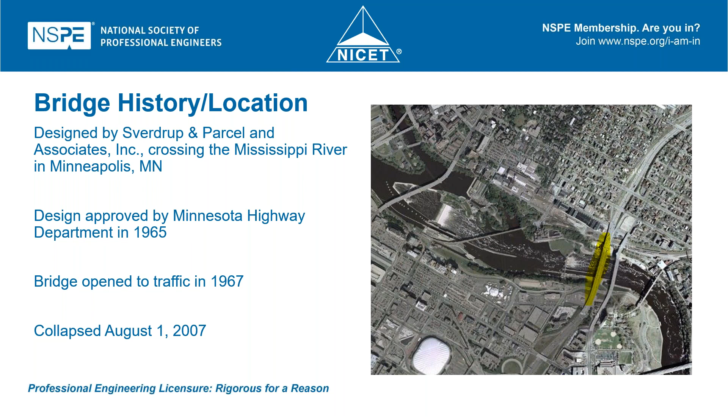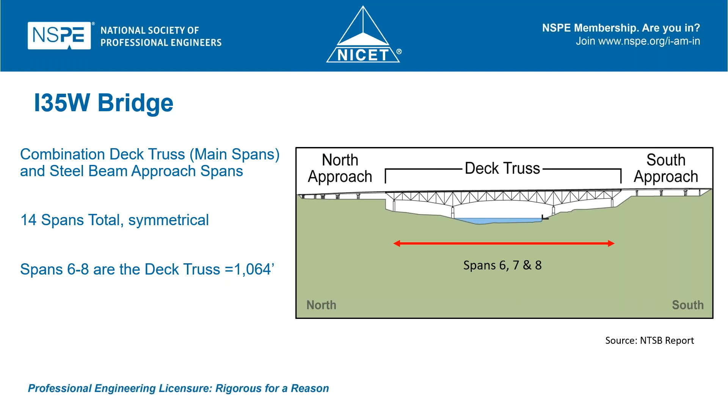It is a combination of deck trusses and steel beam approach spans. There are 14 spans total. It is perfectly symmetric. Spans 6 through 8 are the deck trusses, so exclusive of the approaches, and that is 1,064 feet.

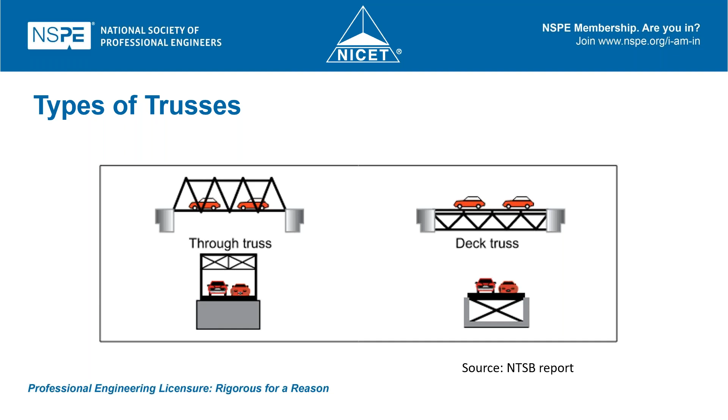Of the types of trusses that we run into, we have through trusses, where the cars are going between the upper and lower span, and deck trusses where both the upper and lower span are below the vehicles, and in fact, the upper span is what's supporting vehicle traffic.

The I-35W deck truss, meaning that the entirety of the truss is below the road surface, was used by 141,000 vehicles per day. And it is a fracture critical bridge. We're going to talk a little bit more about exactly what that means.

But just as a reminder, if you haven't done trusses in a while, the top member of the truss is called the upper chord. The lower member of the truss is called the lower chord. Terribly, terribly creative. And the deck here was 8 lanes wide, 113 feet. And you can see that a portion of the deck is cantilevered.

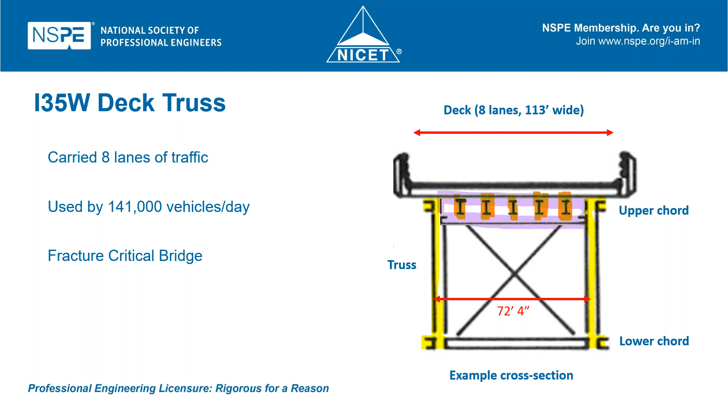So that's the overall structure of the bridge. The I-35W superstructure spans piers 6 through 8, because the north and south approaches are not in structural play. So the part that works as a unit is 6 to 8.

It has 2 trusses, 27 floor beams, which are welded, built-up members in the trusses, stringers that are 27 inches, 14 each between each floor beam at 8-foot 1-inch centers. And the bracing are L members. For orientation, we have the stringers at the top, the floor trusses down from the top, the west truss, the east truss, and then bracing members. All of that is below the road surface.

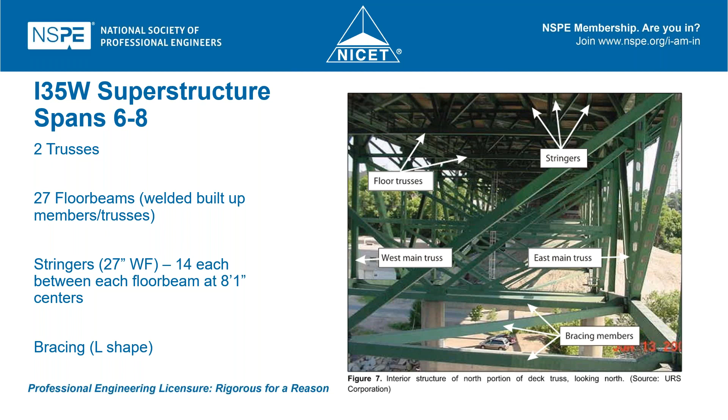Okay, so we have truss members and nodes that come into place here. Along the upper chord, the members are connected with gusset plates. They are connected with both vertical members and diagonal members. They all come together at the gusset plates.

Excuse me for one second, I forgot to remove my phone. Sorry about that.

Our upper chords and the vertical members are welded box shapes. The diagonals are welded H shapes, which you can sort of see from the shadows here. And the nodes are riveted gusset plates. The rivet configuration gets a great deal of attention in terms of the design of the rivets and evaluating the ultimate strength of the members with every puncture hole.

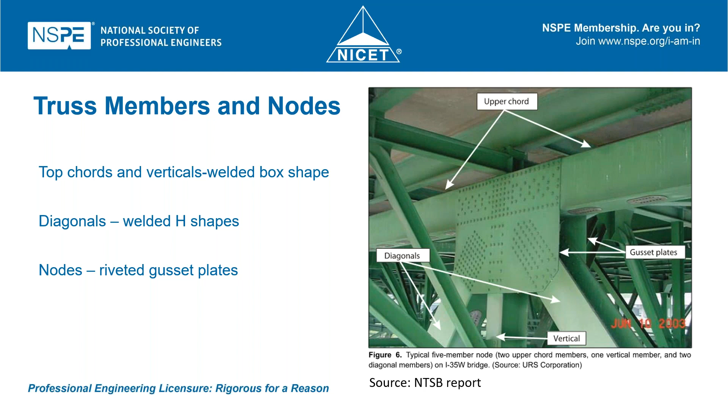You would expect there to be a symmetric failure since it's a perfectly symmetric bridge. Were it not perfectly symmetric, you might get a different distribution of failures, but since it's perfectly symmetric, we would expect a symmetric failure, and in fact, we got one.

Here are the modifications that have occurred to the bridge since it was opened in '67. In 1977, 2.5 inches of concrete was added to the deck to provide additional cover to the reinforcement. In 1998, the median barrier and traffic railings were replaced, an anti-icing system was added, and rehab was performed on the piers, the slab, and the cross girders.

In 2007, there were repairs to the deck slab and the expansion joints. The anti-icing system was replaced, and that work was in progress at the time of the failure.

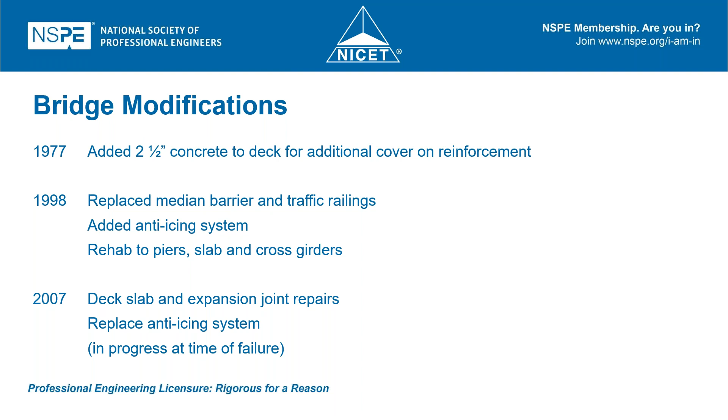Now, think about that for a moment. You have an extremely busy bridge that's partially closed. So the traffic that would normally be splayed across a number of lanes is concentrated into one lane. And add to that, we've got the construction equipment that's on the bridge. Just keep those little things in mind as we take a look at this.

This is the first of the polling questions. Did the 1977 update to the bridge, adding 2.5 inches of concrete to the deck: A, have no effect on the bridge design; B, increase the live load; C, increase the dead load; or D, both B and C?

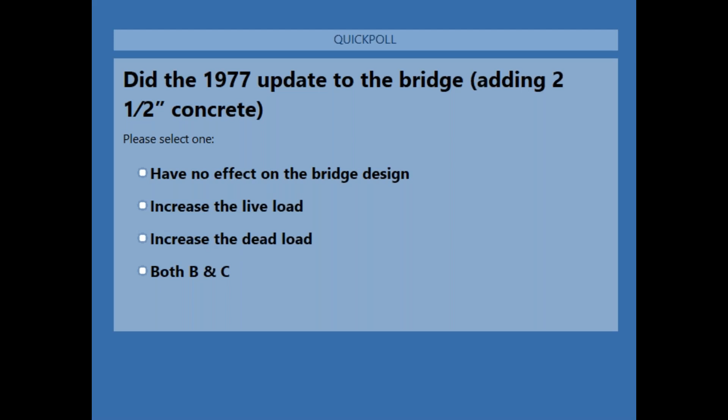All right, the results: 73% said increase the dead load, and 26% said both B and C. In general, the accepted answer would be C. I have seen some elaborate arguments as to why it would affect the live load as well, but it's absolutely uniformly agreed that it does increase the dead load.

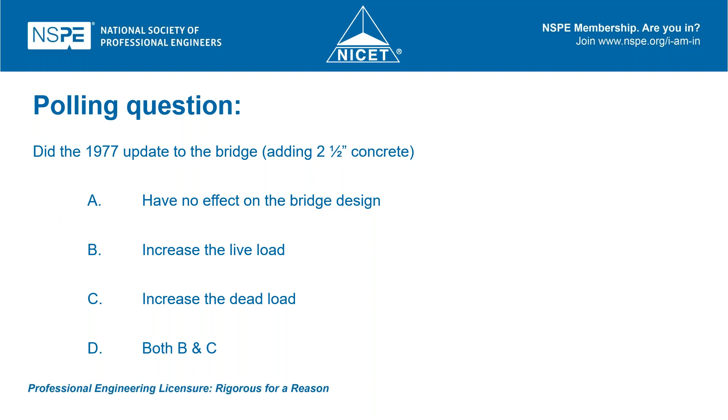Now, I don't know about you, but if I have a change order to a contract while I'm building it that increases the dead load, I go back and take a look at my numbers. Yeah, no, that didn't happen here.

The NBIS regulations apply to all publicly owned highway bridges longer than 20 feet that are located on public roads. They require a bridge inspection at intervals not to exceed 24 months. So anytime you have a highway bridge longer than 20 feet on a public road, the inspection must be completed at least every 2 years. So somebody's looking at the bridge every 2 years.

We're going to take a pretty close look at the bridge inspection process because it's important to understand that process in order to understand the role of the PE in all this.

A bridge safety inspection includes five tasks. The first is planning: identifying in advance the needs for traffic control or traffic restriction, the need for access and safety equipment, inspection tools, personnel, and daily schedules. Unlike a land-based construction project, a bridge inspection process has additional safety factors because you are necessarily in an elevated situation, so the planning here is very much safety focused.

The second step is preparation, which means exactly what you think it means: gather the equipment that you need and identify the services that are required.

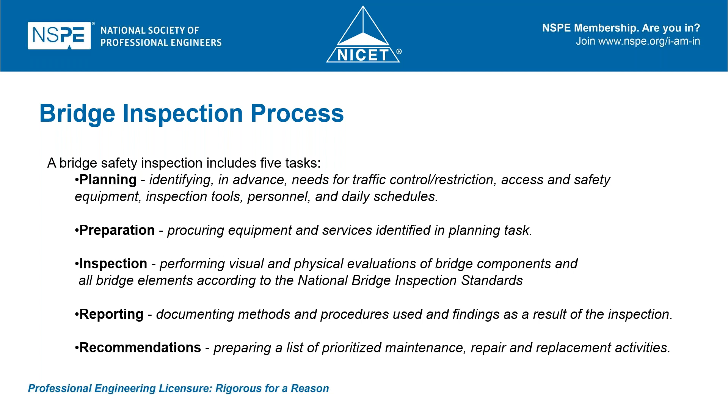The fourth step is reporting, which involves documenting the methods and procedures used and the findings from the inspection. Finally, the recommendations: preparing a list of prioritized maintenance, repair, and replacement activities. We'll talk a little later about whether an inspector has closed facility powers.

A bridge inspection report is a legal document and must be sealed by a PE. It includes specific, detailed, quantitative where possible, observations and photos.

There are qualification criteria from the Federal Highway Administration. A program manager must be a PE and have successfully completed the training course, or have a combination of 10 years of bridge inspection experience and the training course. So a program manager might not be a PE.

The team leader must be a PE and have successfully completed the training course, or have a combination of bridge inspection experience, NICET level 3 or 4 certification, a degree, and a training course. One of those two roles must be filled by a PE, so there are qualification options for both roles, but one of them must be a PE.

The bridge inspector's role is to be continually on guard for minor problems that can become costly repairs, to recognize bridge components that need repair in order to maintain bridge safety and avoid the need for costly replacement, and to make recommendations to close a bridge if necessary. So yes, the bridge inspector does have closed facility power.

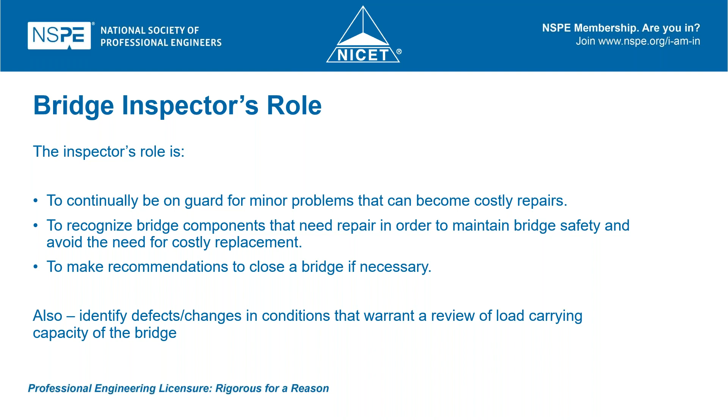So we've talked about his responsibilities. What are the bridge inspector's liabilities? In the event of negligence in carrying out the basic responsibilities described above, an individual, including department heads, engineers, and inspectors, is subject to personal liability. That's huge. Strive to be as objective and complete as possible.

Accidents that result in litigation are generally related, but not necessarily limited to, deficient safety features, failed members, failed substructure elements, failed joints or decks, potholes or other hazards to the traveling public, and improper or deficient load posting.

Anything said or written in the bridge file could be used in litigation cases. In litigation involving a bridge, the inspection notes and reports may be used as evidence.

If you've ever participated in a mediation, one of the things the mediator tells you right out of the gate is that nothing said during the mediation can be used in court. You cannot subpoena the mediator's notes, you cannot subpoena anything presented to the mediator, and you cannot subpoena or ask any questions about settlement discussions.

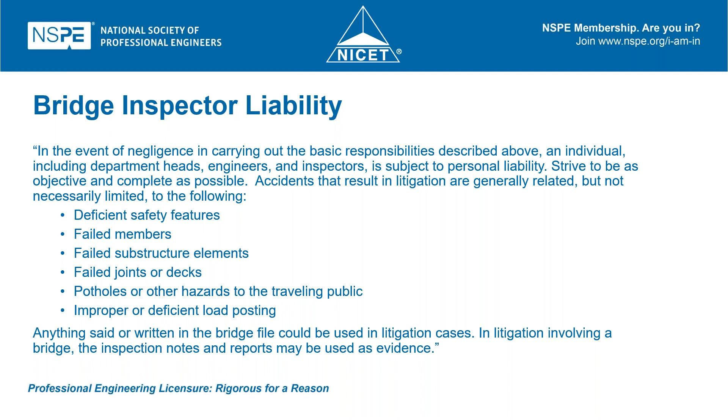And you'll notice it's personal liability. There are a couple of states that do not permit indemnification of a bridge inspector by the employer, which means that the employer's insurance would not be answering those claims. Be sensitive to that. By the way, you're not in one of those states, so that's good. But be aware that there are states that prohibit an employer from indemnifying a bridge inspector for negligent work.

This is sort of a little bit for the fun of it because it's cool, but this is a picture of a snooper being used. You can see that the crane is up on the deck and it has a C-shaped arm that comes down and carries the inspector about.

Inspecting a large bridge like this takes several days to weeks, and the inspection includes the superstructure, the substructure, and the deck, which makes sense.

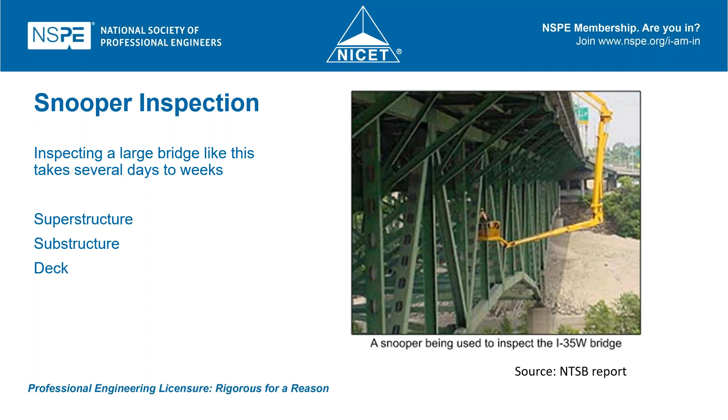Now, we've seen some enthusiasm lately for inspections conducted by drone. I don't know exactly where that's going. I rather expect that it will gain in popularity. For one thing, it's safer. And if you attach a robotic camera to the end of maybe a snooper arm like that, you can get all of the outside pieces that way if you want to, and send the drone in to do the interior pieces. This requires some very tight drone operation because, again, the images must be within touching distance or arm's length. That standard has not varied whether a drone is being used or not.

Okay, here are the I-35W bridge condition ratings over the years. So one of the conversations we need to have is, what is structurally deficient? Structurally deficient means a bridge has deterioration to one or more of its major components, that being the deck, the superstructure, and the substructure. And that deterioration results in a component condition rating of 4 or less.

So you see here in Table 5, the condition ratings, sufficiency ratings, and status for the I-35W bridge, between 1983 and 2007. In '83, '84, '85, '86, '87, '88, '89, '90, you see that everything is well above a 4. There's 6s, 7s, a couple of 8s.

So in '91, however, we see that we have gone to structurally deficient. And it's structurally deficient the rest of the time, except for 1999. The reports indicate structural deficiency. All of the structural deficiencies have occurred in the superstructure, but it renders the entire structure structurally deficient. So that's the status that was being sent out.

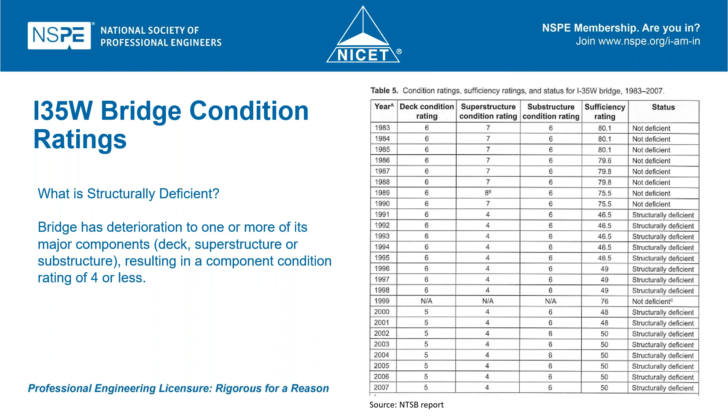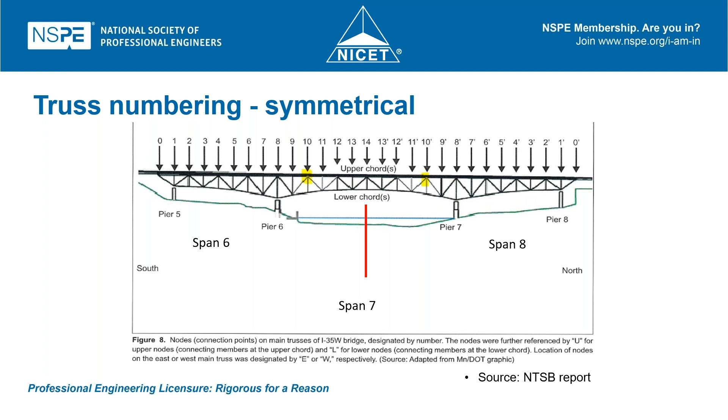U10 east on the east side of the bridge, looking north, you can see that, again, that line is not a straight line. It isn't terribly obvious from that photograph how the gusset plate is bowed, because it could also look like it's a little bit crumpled, but it's not. It's bowed relative to the surface of the gusset plate.

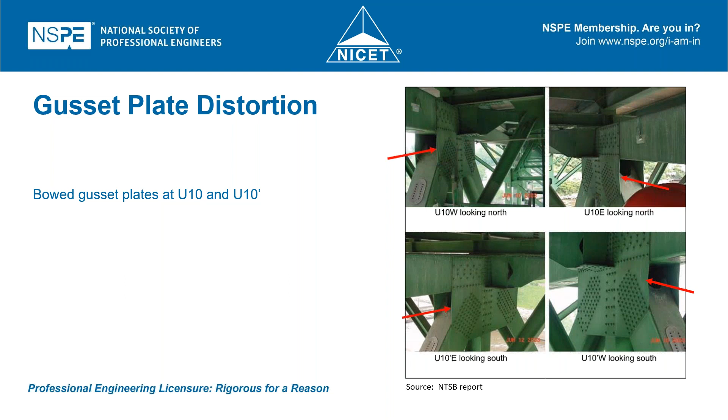It's convex. U10 prime east, looking south, is bowed. Not so obvious in that picture at all. But U10 prime west, looking south, it's obvious that that is not a straight line. So we have documentation of bowed gusset plates at exactly the failed locations.

The bridge collapsed August 1st, 2007. It was 6:05 p.m., rush hour, with extra traffic going to a baseball game. There were 111 vehicles on the bridge, 13 fatalities, and 145 people injured. The collapse of the river spans also caused collapses back into the approach spans.

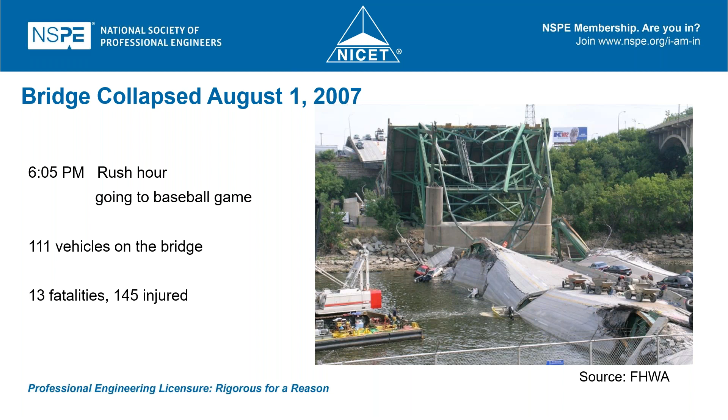The NTSB investigation and recommendations, this information comes from the NTSB report. The cause of the collapse was inadequate load capacity of the gusset plates at the U10 node, due to design error, and the design review process was inadequate. The result was that the bridge design QA/QC process must be improved because the design error was not caught.

In addition, we had distorted gusset plates at U10 and U10 prime that were not documented in the bridge inspection reports. As a result of this finding, the FHWA issued guidance and revised the bridge inspection training courses to emphasize gusset plates, inspection techniques, and non-destructive evaluation.

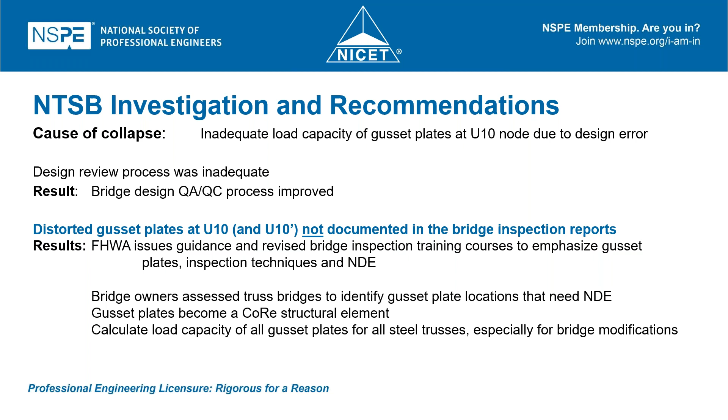What's key about that finding is that gusset plates were not on the list of required inspection. Now they are, because there was no finding of an issue with anything except the gusset plates. So bridge owners assessing truss bridges are to identify gusset plate locations that need non-destructive evaluation. Gusset plates became one of the core structural elements, so we now have four. Bridge owners were required to calculate the load capacity of all gusset plates for all steel trusses, especially for bridge modifications.

Second polling question. During inspection, the inspector should have: A, reviewed all items specified on the inspection list; B, observed and noted that gusset plates were bowed; C, observed and noted that some gusset plates were a half inch and some were one inch; D, all of the above.

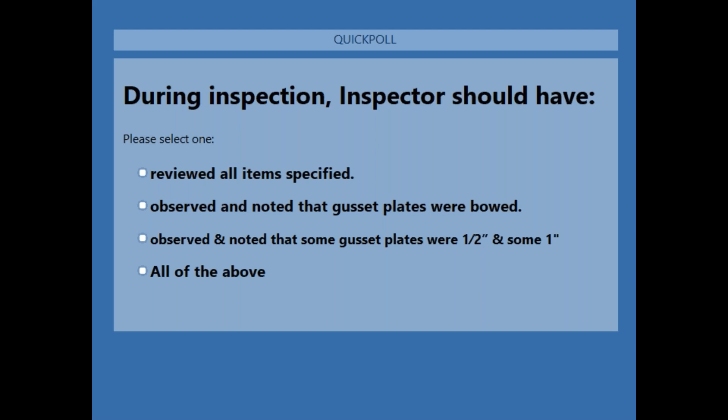Okay, our results: 5% said reviewed all items specified, 8% said observed and noted that the gusset plates were bowed, 1% said observed and noted that some gusset plates were half inch and some one inch, and overwhelmingly 85% said all of the above.

Okay, everybody in that 85% should pat yourselves on the back. Doing the minimum inspection, reviewing all the items specified, isn't all there is to the process. The inspector is there to bring the inspector's knowledge and experience.

If you see something that should be a straight line and it's not a straight line, that should be observed and noted. And you can't possibly inspect the members in the superstructure, the substructure, and the deck without going past the gusset plates. You simply physically can't do that. So yes, you should look at the gusset plates, noticing they were bowed. Even if you take a photograph of their current condition and go back and say, I see from this photograph they were bowed like that before, fine, but you still report it.

Now, C is an interesting one. The design called for all gusset plates to be one inch, and of course the inspector has the plans going in. The inspector is not expected to run around with a ruler checking if the gusset plates are all one inch thick. But trust me, if you've done any kind of work with structural steel members, you can quickly recognize something that's half of the one inch depth requirement versus the full inch. You might not know if it's 7/16 or 9/16, but you can quickly see it's not one inch. And that should have been noted.

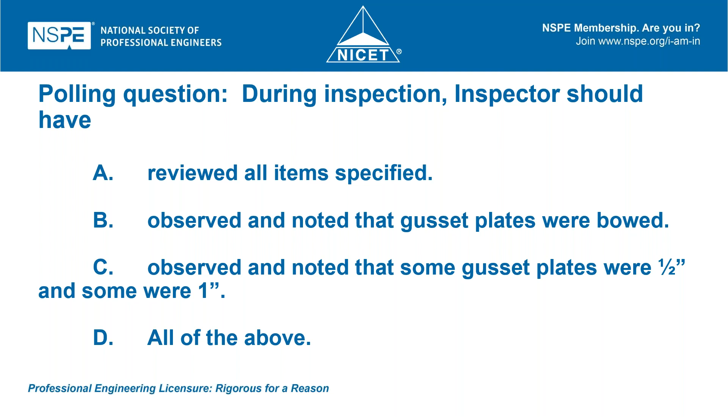So the answer here is all of the above.

So February 11th, 2009, PennDOT issued Directive 2009. Now, I know you're not Pennsylvania, but I am, and so that's the example I use. Almost all the DOTs did something roughly equivalent because the Federal Highway Administration required them to. In publication 238, the Bridge Safety Inspection Manual, there were revisions to chapters 3 and 6.

And they addressed the inspection and load rating of steel gusset plates, and those revisions were effective immediately. So as soon as this was put into play, all the inspectors had to go to a special one-off update training course, and then it was incorporated into subsequent presentations of the training course.

Now, what is non-destructive evaluation? Let me back up a second and say we all know what destructive evaluation would be, like taking a core or slicing off a rivet to investigate the nature of the connection behind it. That's not really helpful because then you have a problem. You've created a problem. So we want to focus on tools for non-destructive evaluation.

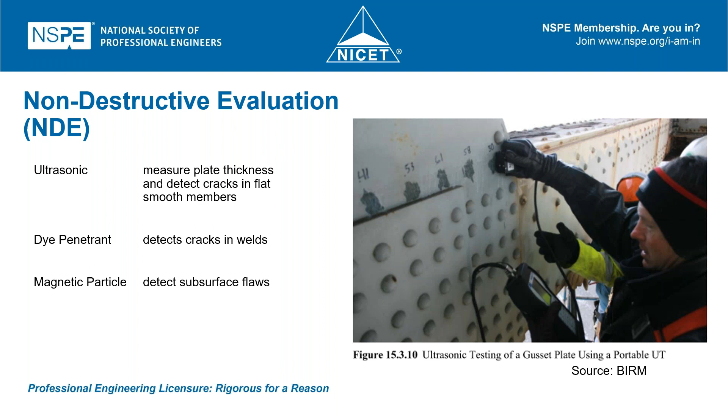I mean it has the tightest, most thorough information as the outcome. The dye penetrant is a visual tool, and the magnetic particle one is the opposite of that. It's absolutely below the surface. So there are tools for doing non-destructive evaluation. Now, it's extremely labor intensive and expensive, so you want to do what you can to minimize the amount of non-destructive evaluation that you have to do.

Okay, here's the outcome. The state of Minnesota paid $36.64 million to victims' families and survivors. The contractor paid $10.15 million in settlement of a lawsuit against it by victims' families and survivors, and paid $1 million to the state of Minnesota. That's to offset part of the 36.64.

URS agreed to a $52.4 million settlement of a lawsuit against it by victims, families, and survivors, and paid $5 million to the state of Minnesota to offset against that 36.64.

Since the bridge was designed, Jacobs Engineers had purchased Sverdrup, and they paid the state of Minnesota $8.9 million while admitting no wrongdoing. Now, I'm a lawyer, so that language doesn't shock me. But for non-attorneys, the idea of the design engineer, when there was clearly a design flaw, admitting no wrongdoing, gets your dander up.

Well, here's how that works. In a settlement, you will always see language that says, we admit no liability, but we want to settle this, so we agree to pay X. That's standard settlement language, because if that language wasn't in there, the settlement agreement could automatically create civil liability in other settings. So every settlement agreement I've ever dealt with since I became an attorney back in the 80s has had that sort of disclaimer language in it that says, I'm not admitting to liability, but I am paying a settlement. So try not to take offense at seeing that language there. It's just part of a settlement.

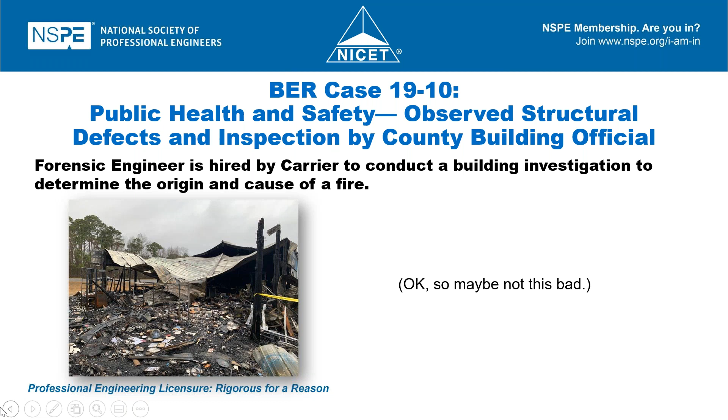I found a free-use photograph of a building after a fire. Our building wasn't quite this bad, but it gives you an idea. During the investigation, the forensic engineer, who is also a structural engineer, observes that the building is structurally unstable.

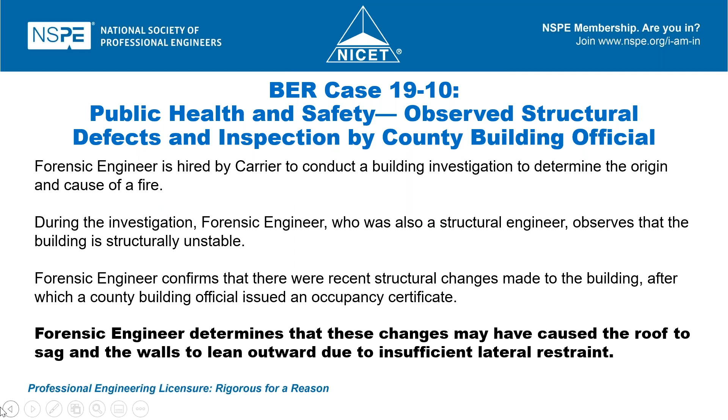Forensic engineer confirms that there were recent structural changes made to the building, after which a county building official issued an occupancy certificate. Forensic engineer determines that these changes may have caused the roof to sag and the walls to lean outward due to insufficient lateral restraint.

Forensic engineer believes that although not imminent, collapse of the building is a danger. Forensic engineer immediately advises the carrier, recommends to the owners that they brace the building to prevent its collapse, and calls the county building official, who doesn't call back.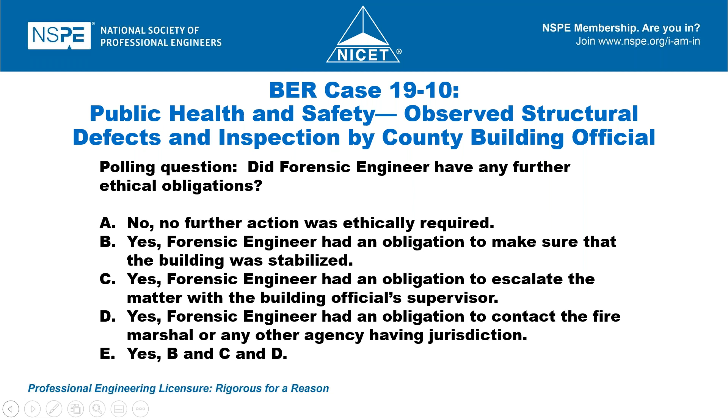So here's the BER's analysis. In this case, a professional engineer is presented with a situation involving a potential impact on the safety and welfare of the public. Forensic engineer brought concerns to the carrier and the owners and contacted the building official. Although forensic engineer did not believe the building was in danger of imminent collapse, forensic engineer had an obligation to continue to pursue a resolution of the matter by working with the carrier and the owners.

Forensic engineer also had an obligation to contact the supervisor of the county official, the fire marshal, and any other agency having jurisdiction, advising them of the structural deficiencies.

So that paramount duty to public health, welfare, and safety drives the actions required of us, especially when we're doing an inspection. The reason we are asked to do an inspection is to make sure that safety is protected in a variety of ways. Sometimes it's code compliance, sometimes it's other kinds of contractual compliance. But the ultimate purpose of doing an inspection in the first place is to make sure that the structure is safe.

BER case 07-10, public health and safety, knowledge of a potentially dangerous condition. Engineer designs and builds a barn with horse stalls on his property. Four years later, engineer sells the property, including the barn, to Jones. Later, Jones decided to extend the barn, and as part of the extension, removed portions of the columns and footings that support the roof. The changes were approved, the extension is built, and a certificate of occupancy is issued.

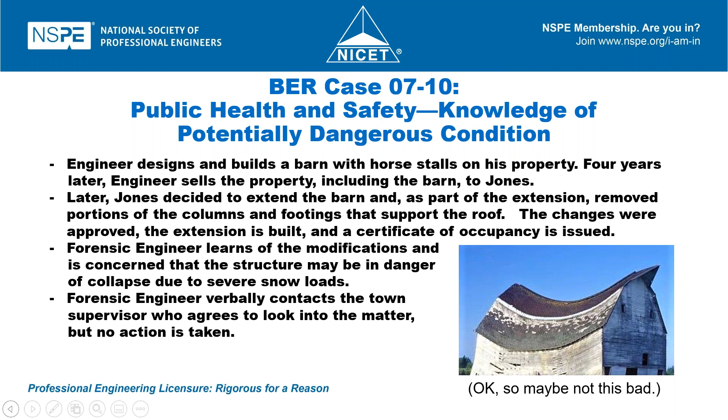Forensic engineer learns of the modifications and is concerned that the structure may be in danger of collapse due to severe snow loads. Forensic engineer verbally contacts the town supervisor, who agrees to look into the matter, but no action is taken. Again, I gave you a slightly exaggerated photograph just to give you an idea.

Polling question. What are forensic engineers' ethical obligations? A, nothing else, he's just guessing. B, nothing else, telling the town supervisor is enough. C, tell the property owner, Jones, of the concerns. D, give the township supervisor written notice. E, follow up. If the town supervisor does not take action, notify appropriate state officials. And F, C, D, and E.

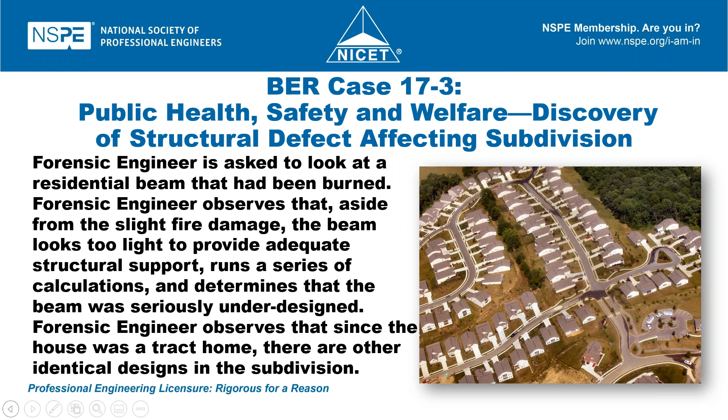Forensic engineer observes that since the house was a tract home, there are other identical designs in the subdivision. Guess what's coming? Forensic engineer writes the report, identifies the design defect, and expresses the larger concern regarding the possibility that an inadequate structural member was used in other houses in the subdivision. Forensic engineer submits the report to the insurance company.

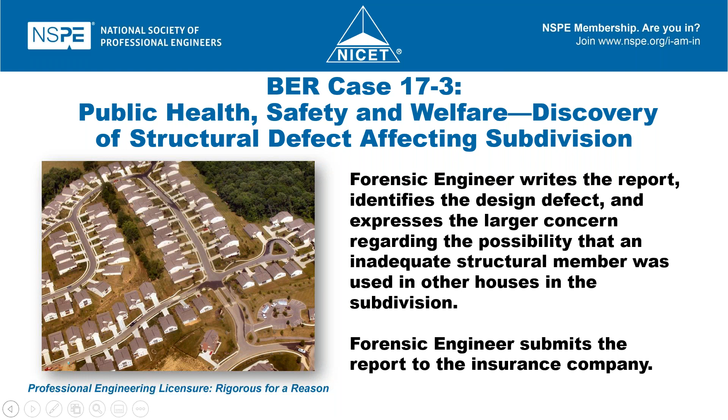Forensic engineer, still concerned with an obligation to the public beyond just informing the insurance company, calls the State Board of Professional Engineers, apprises them of the situation, and asks what more could and should be done. Notice, forensic engineer did not call the NSPE ethics hotline. The board's response is that the forensic engineer fulfilled the professional obligations by notifying the insurance company in writing of the defect.

Polling question. Was a written report to the insurance carrier enough? A, yes. B, yes, to avoid claims, the insurance carrier will be motivated to push for correction. C, no, should have notified the local officials. D, no, if there's a homeowners association, should have notified the HOA. E, no, should have notified each affected homeowner. Or F, and I know this is going to be a chat one again, C, D, and E.

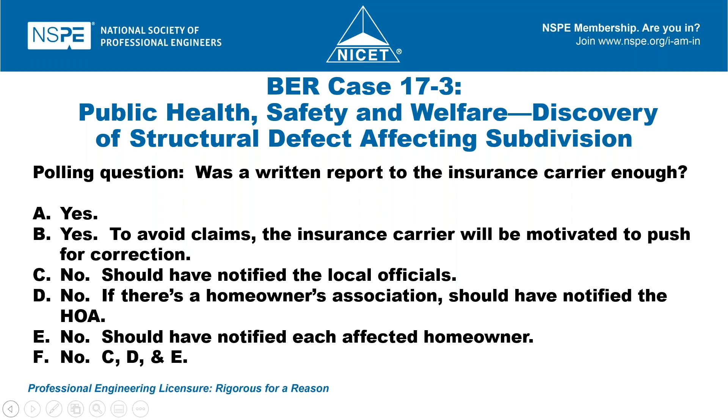The only one that's iffy here is E. Notifying each affected homeowner is based totally on the assumption that the same beam size was used throughout. That is a guess. So you could make an argument that it would be presumptuous and disruptive to notify each affected homeowner, but that would be the most effective way to get the word out.

So here's what the BER said. A state engineering licensure board, while an important guidepost in determining appropriate conduct, establishes the legal minimum standards of practice under which an individual may be subject to disciplinary action for failing to fulfill the appropriate requirements. However, the NSPE Code of Ethics establishes a higher threshold of ethical conduct. Contrary to the advice of the State Board of Professional Engineers, Engineer A did not fulfill his ethical obligations under the NSPE Code of Ethics by only providing the report to the insurance company.

Although a threat isn't imminent, this matter had the potential to affect several other homeowners in the subdivision. Engineer A had a responsibility to take additional steps beyond merely submitting a written report to the insurance company, including contacting local building officials, individual homeowners, and the homeowners or community civic association to advise them of the finding. So the BER's finding was all of C, D, and E.

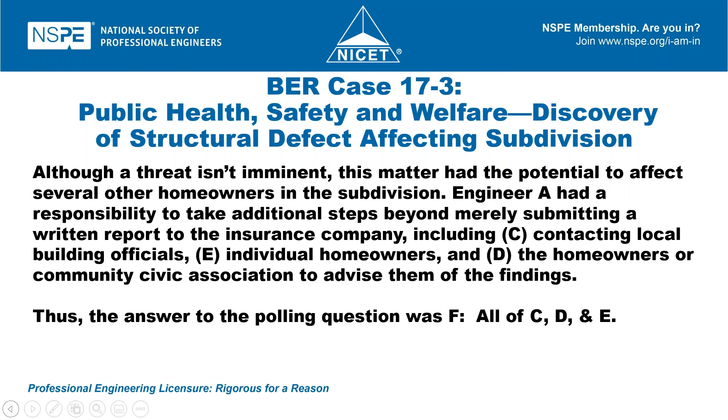Engineer A had barricades and signs erected within the hour on a Friday afternoon. Residents in the area were required to take a 10-mile detour. On the following Monday, the barricades were in the river and the bridge closed sign was in the trees.

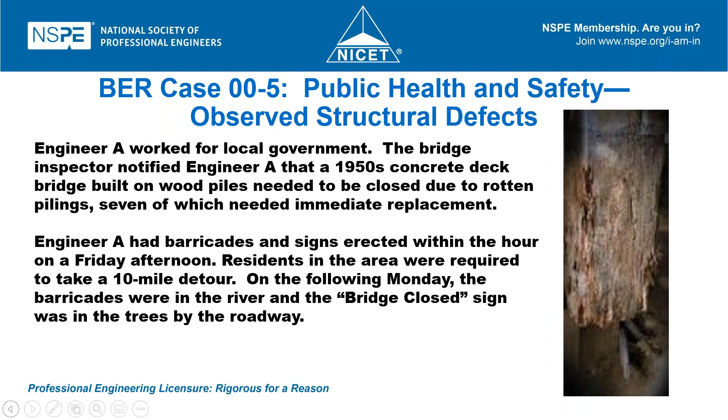More permanent barricades and signs were installed. The press published photos of the piles dangling over the river because they no longer reached the ground. Within 3 weeks, Engineer A had obtained authorization for the bridge to be replaced.

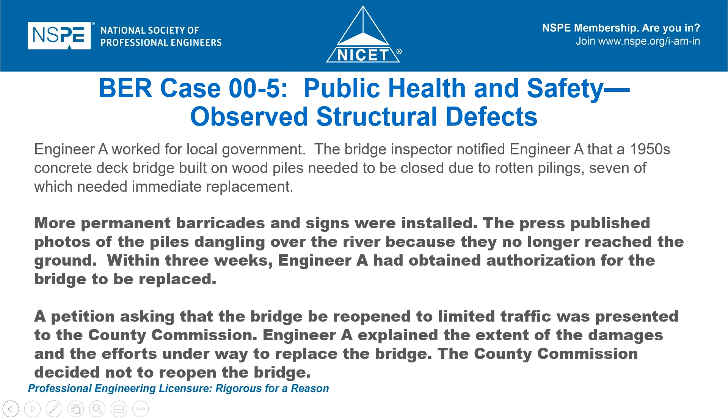A petition asking that the bridge be reopened to limited traffic was presented to the county commission. Engineer A explained the extent of the damages and the efforts underway to replace the bridge, and the county commission decided not to reopen. A non-engineer public works director decided to have a retired bridge inspector, who was not an engineer, examine the bridge.

The non-engineer retired bridge inspector recommended that 2 crutch piles be installed under the bridge and open the bridge with a 5-ton limit. The non-engineer public works director agreed. No follow-up inspection was undertaken.

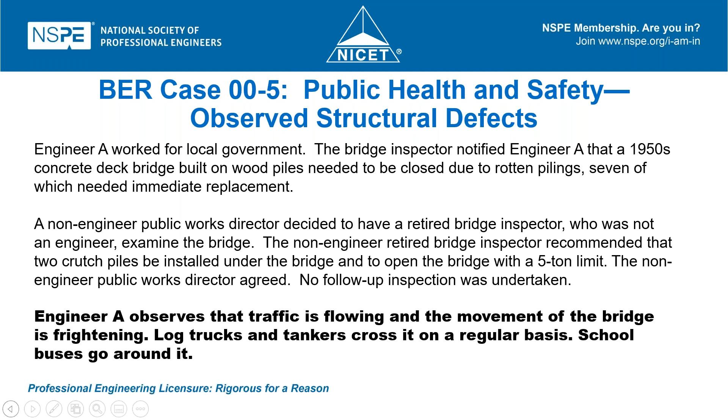Engineer A observes that traffic is flowing and the movement of the bridge is frightening. Log trucks and tankers, both of which are well over the 5-ton limit, cross it on a regular basis. School buses, wisely, are going around.

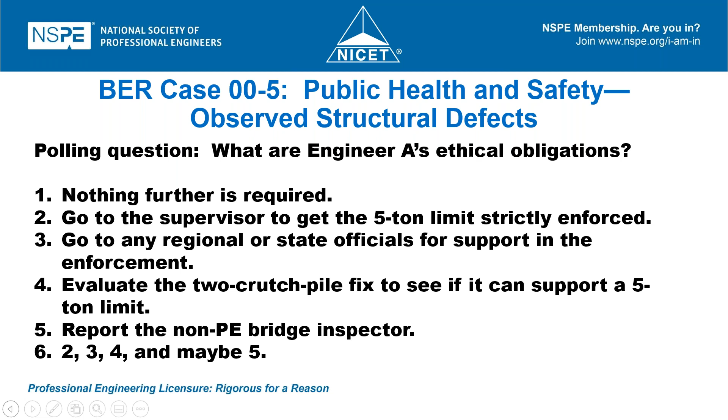We're going to skip this polling question. What are the ethical obligations? Get the 5-ton limit enforced, get support, evaluate the 2 crutch piles, and report the non-PE bridge inspector.

What the BER said: Engineer A should take immediate steps to ensure enforcement of the 5-ton limit. And if that's ineffective, contact state and federal officials, the state licensing board, the director of public works, the county commissioner, state officials, and such other authorities as appropriate. Anybody he can put his hands on.

Engineer A should work with the consulting engineering firm to determine if the 2 crutch piles are sufficient. In addition, Engineer A should determine whether a basis exists for reporting the activities of the retired bridge inspector as unlicensed practice. The answer here is 2, 3, and 4, maybe 5.

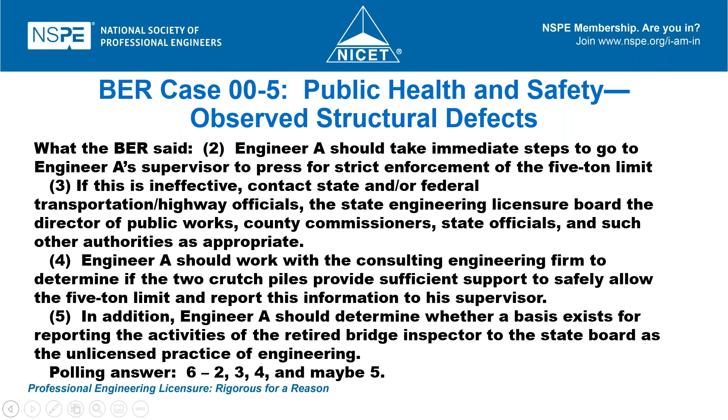Thank you so much. We do have one last question about the barn. We're focused on ethics today. However, does it matter that the barn is a private structure from a legal perspective?

It does not. Public is public, and the public means anybody. So the people mucking out the stalls are the public, the people who ride the horses stabled in the barn are the public, the owner is the public. So public is very broadly viewed when determining where the obligations trigger. It is not a function of whether the facility is owned by the public.